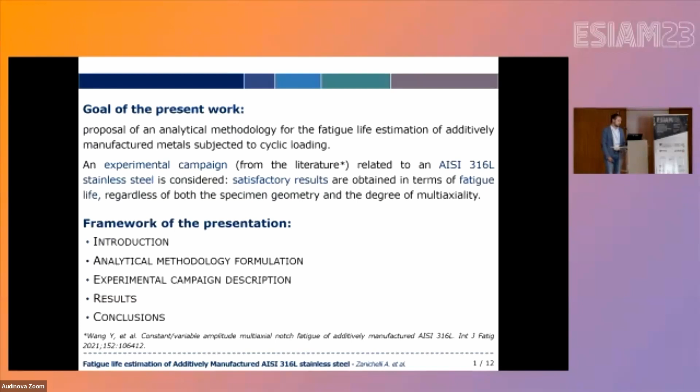My presentation consists of the following sections. After a brief introduction related to additively manufactured metals, I will describe the analytical methodology proposed for the fatigue assessment of such materials, even in the case of stress concentration. Then I will summarize the experimental campaign analyzed. Finally, I will show the results obtained in terms of fatigue life estimations for both the plain and notched components before moving on to conclusions.

Very briefly, as is well known, additive manufacturing is characterized by many advantages with respect to traditional manufacturing techniques, such as the realization of customized structural components and considerably low material waste. But despite the many desirable features, the AM field is still characterized by several open challenges related to the uncertainty on the structural performance of these materials, especially under complex cyclic loadings typical of in-service conditions.

For example, the fatigue performances of AM components appear to be reduced with respect to the corresponding traditional metals, both in low and high cycle fatigue regimes. This is mainly due to internal defects, residual stress, surface roughness, and material anisotropy, which are all related to the specific manufacturing process.

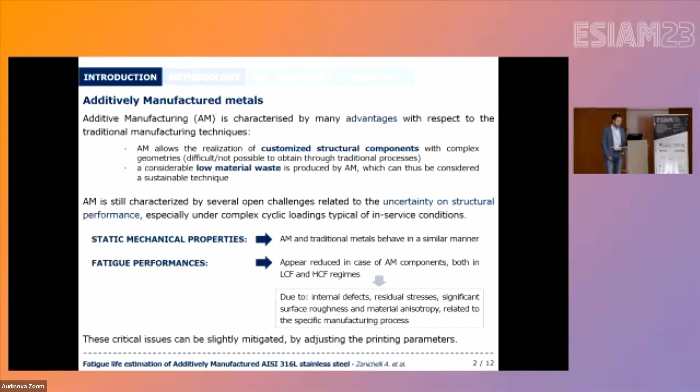In order to counteract these disadvantages, AM components can be subjected to post-manufacturing treatments, that is surface treatments or heat treatments. This is mainly in order to improve the surface finish and to introduce a superficial compressive residual stress, as well as to homogenize the material microstructure and to reduce the internal defects.

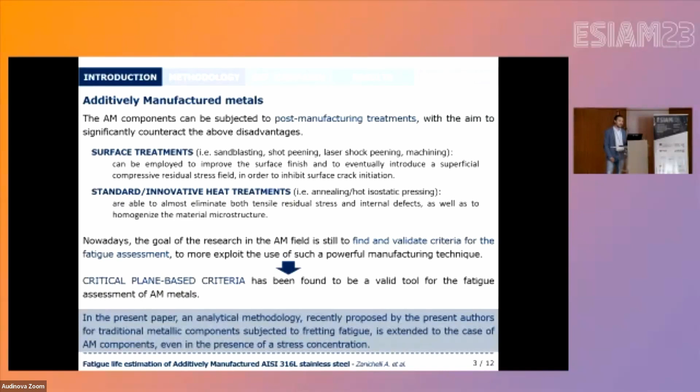In this context, the goal of research is still to find and validate criteria for the fatigue assessment of AM metals. In particular, critical plane-based criteria have generally been found to be a valid tool to this aim. So in the present paper, an analytical methodology recently proposed by the present authors for traditional metallic components subjected to fretting fatigue is extended to the case of AM components, even in the presence of a stress concentration.

Let me first describe this methodology, which is based on the joint application of a multiaxial stress-based fatigue criterion exploiting the concept of the critical plane, that is the Carpinteri criterion, and a stress averaging method, that is the critical direction method. The Carpinteri criterion is used to define the fatigue parameter and to perform the fatigue life assessment of the component, whereas the critical direction method is employed to determine the critical plane orientation.

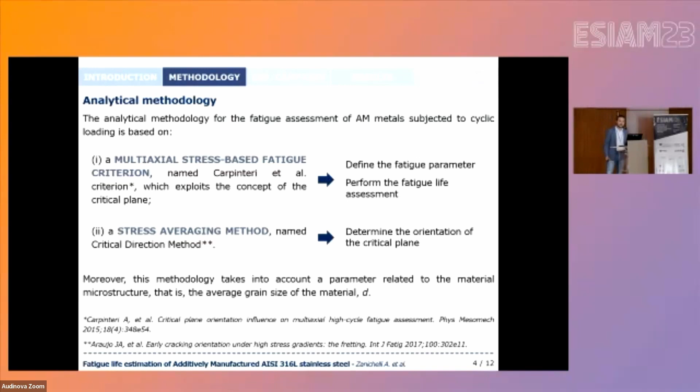Moreover, this methodology takes into account a parameter related to the material microstructure, that is the average grain size of the material, named here D. Here are shown the main steps of this methodology in the case of metallic structures with stress concentrations.

First, some input data need to be set, that is the geometric sizes characterizing the notched component, the loading conditions, and the mechanical and fatigue properties of the material. Then the stress field is computed within the structural component, and the hotspot location is defined on the surface of the component itself.

That is, the crack nucleation location is defined. After that, the critical plane orientation is determined by employing a procedure which is based on the critical direction method. And finally, the fatigue assessment is performed by employing the Carpinteri criterion.

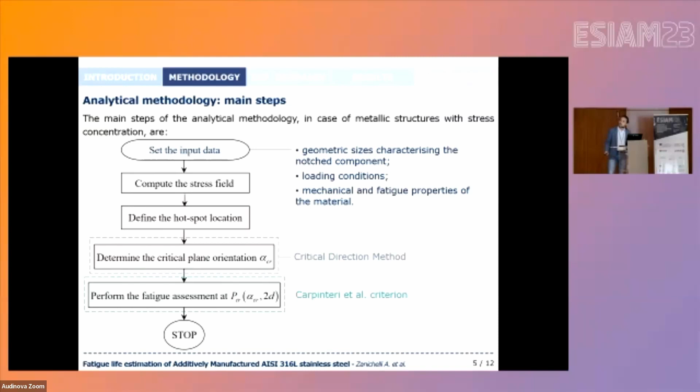So relatively to the determination of the critical plane orientation, once the hotspot is defined on the material surface, different material planes are considered, and these material planes pass through the hotspot and are characterized by an orientation alpha. So firstly, a proper angular increment delta alpha needs to be set, and then an initial value of alpha equal to 0 is assumed, that is an initial critical plane candidate is considered.

And in particular, this critical plane candidate is represented by a segment which starts at the hotspot and moves inward to the structural component up to a length equal to twice d. So then both the amplitude and the mean value of the normal stress component acting on the corresponding plane are computed in many equally spaced points belonging to the segment, as you can see in the figure.

And then they are averaged, and their averaged values, N_a and N_m overlined, are employed to compute the fatigue parameter N_eq,a, which is given by the equation shown here according to the Carpinteri criterion. So then a new material plane is considered, and this procedure is iterated for all the material planes inward the structural component. So finally, the orientation alpha critical, which maximizes the fatigue parameter, is assumed to be the critical plane orientation.

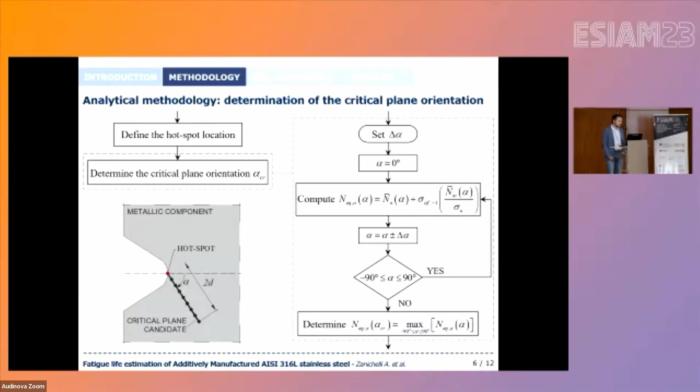Well, once the critical plane orientation has been defined, the fatigue assessment follows, and it is performed by employing the stress components acting on the critical plane itself at the verification point P critical, which is located here at the end of the segment representing the critical plane, that is at a distance from the hotspot equal to twice d. And the fatigue life is computed according to the Carpinteri criterion by iteratively solving the equation shown in the slide.

So finally, it is important to highlight that in case of plain specimens without notches, the critical direction method is not applied. As a matter of fact, the critical plane orientation in this case is determined according to the original formulation of the Carpinteri criterion. And moreover, the verification point coincides with the hotspot on the material surface.

So let me now briefly describe the experimental campaign used for the verification of the proposed methodology. In particular, we consider the experimental campaign carried out by Wang et al. on additively manufactured AISI 316L stainless steel, subjected to cyclic loading. During this experimental campaign, the selective laser melting technology was used, and a post-manufacturing heat treatment was performed. Then each specimen was machined from the annealed rods by means of a conventional lathe in order to guarantee the same surface finish to all the specimens.

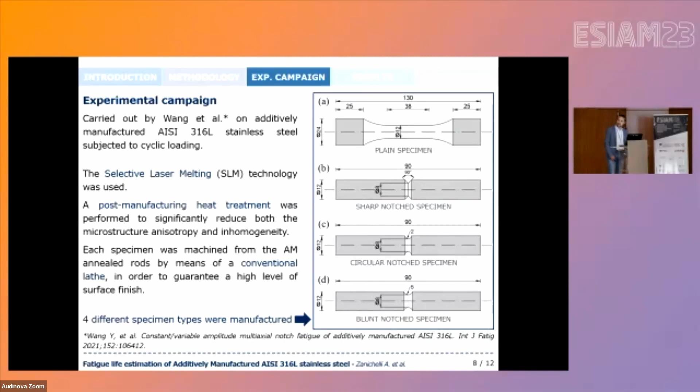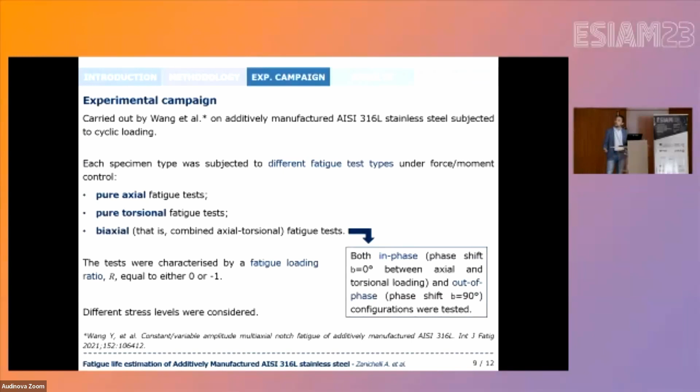And in particular, as you can see in the figure on the right, 4 different specimen types were manufactured. That is a plain specimen and 3 different notched specimens characterized by sharp, circular, and blunt notches. Then each specimen type was subjected to pure axial, pure torsional, and biaxial fatigue tests. Relatively to the biaxial fatigue tests, both in-phase and out-of-phase configurations were tested, and the tests were characterized by a fatigue loading ratio equal to either 0 or -1, and finally different stress levels were considered for each loading configuration.

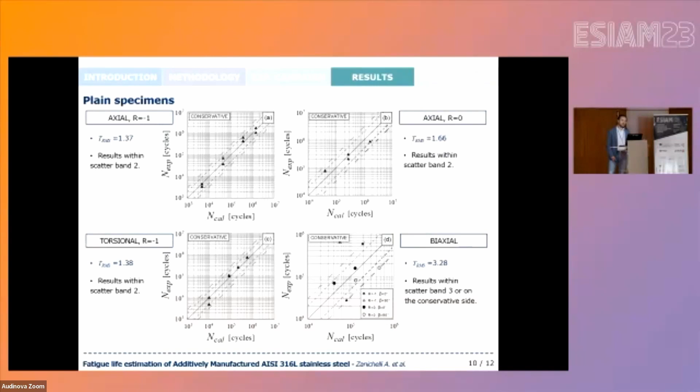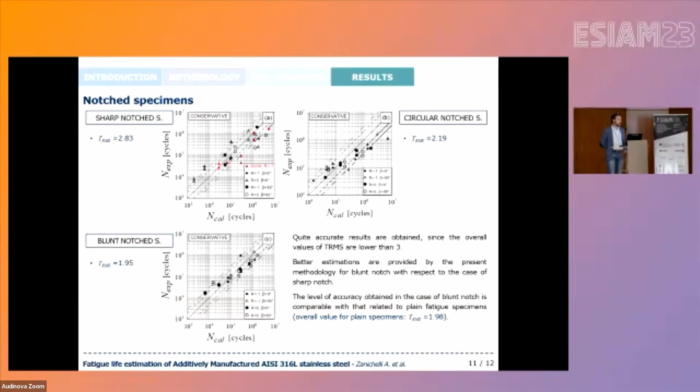And here you can see the same results for the notched specimens. Also in this case, quite accurate results are obtained since almost all the results fall within scatter band 3, and this holds true irrespective of the loading configurations. A TRMS value approximately equal to 2 has been obtained for both blunt and circular notched fatigue tests, whereas in the case of sharp notch, a quite higher value has been obtained. The level of accuracy obtained for blunt notch is comparable with that of plain fatigue specimens, which were characterized by an overall TRMS value equal to 1.98. And now let us move to the conclusions.

In the present paper, an analytical methodology has been proposed for the fatigue life estimation of additively manufactured metals subjected to cyclic loading. This methodology is based on the joint application of the Carpinteri criterion and the critical direction method, and it has been applied to an experimental campaign taken from the literature, related to both plain and notched AM stainless steel specimens. A high level of accuracy has been obtained in terms of fatigue life assessment, at least for the material considered.

The overall TRMS values are lower than 2 for both plain and blunt notched specimens, slightly higher than 2 for circular notched specimens, and higher for the sharp notched specimens, but still lower than 3. Moreover, the level of accuracy appears to be almost independent of the load configurations, which confirms the robustness of the applied methodology, able to provide satisfactory results irrespective of the loading type, the degree of multiaxiality, and the degree of non-proportionality.

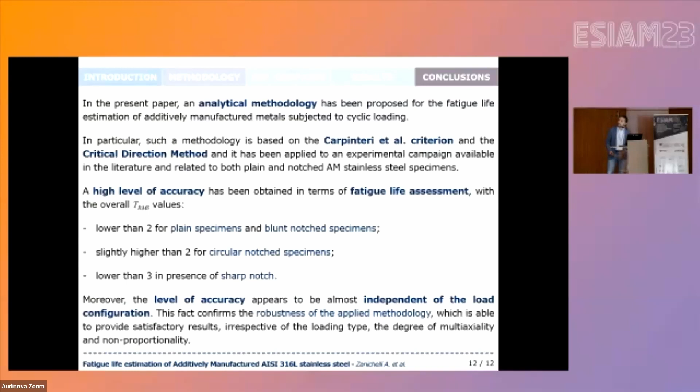It's necessary to comment on this approach, because it is appropriate for a material like the one you selected, this 316L, because this material has parallel lifetime curves in tension and torsion. In your approach, you use the conventional fatigue limit, but the ratio between tension and torsion differs across the lifetime region in other materials, where these lines are not parallel. It is necessary to extend this approach to more general materials, because this material seems conventional, but specific to additive manufacturing are these non-parallel lines. Yeah, yeah.

Actually, in this case we applied it to this material, but we have already applied this procedure to many different material types in the field of fracture and fatigue. And we take into account the two different slopes of the S-N curves in the computation of the fatigue life, because, as you see, the exponents m and m* are the slopes of the S-N curves under normal and shear loading. So, not for AM metals, but for conventional metals, we have already applied it to different types of materials, also with different slopes in the S-N curves.